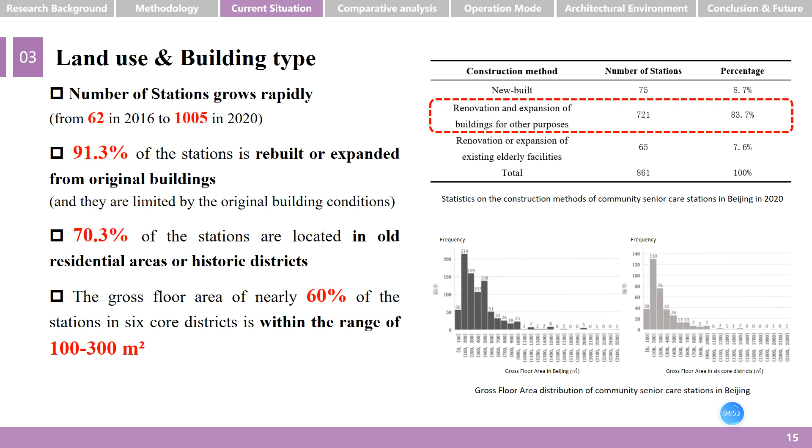In terms of land use and building type, the number of stations has increased significantly in recent years, but more than 90% of stations are rebuilt or expanded from original buildings, and 70% of stations are located in old residential areas or historical districts with restricted building conditions, and the gross floor area is small.

In terms of distribution, there is uneven distribution of independent and chain stations. In summary, station number is growing continuously, but most of the stations still face many problems, such as uneven distribution, restricted building conditions, and unpromising service situation.

services is higher. In terms of profit and loss, the operating cost of chain stations is much lower than independent stations. However, the loss situation has not improved. According to the information obtained from field interviews, it may be because some brands do not have station check-in services and have higher decoration standards, and the income of door-to-door service and the catering service belongs to the head office, and the station only plays a docking role.

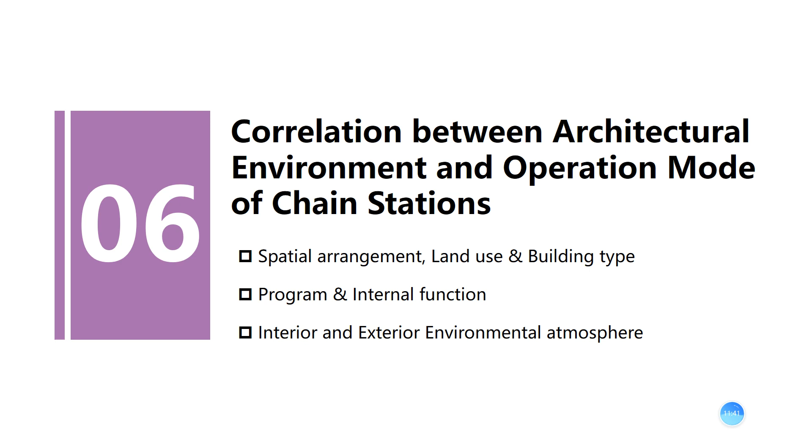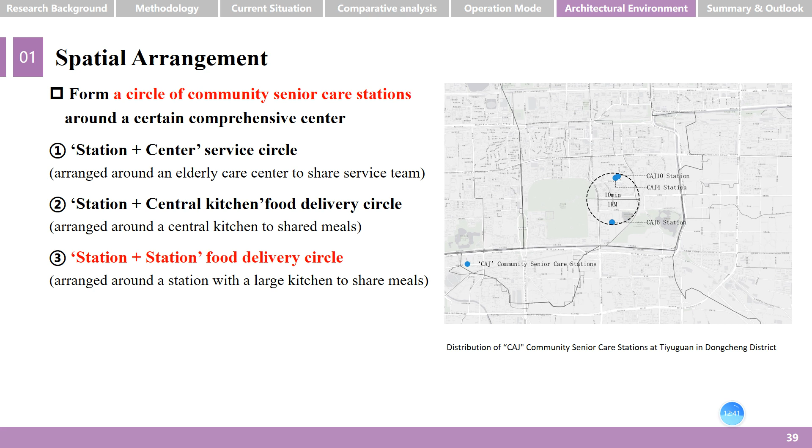For example, Longzhen stations are laid out around care centers, sharing service teams and forming a 3 km diameter station plus center service circle. Hongfengying stations are laid out around the central kitchen, sharing meals and forming a 3 km diameter station plus central kitchen delivery circle. And the CAJ stations in Gymnasium Road block are laid out around the station with a large kitchen, sharing meals and forming a 1 km diameter station plus station delivery circle.

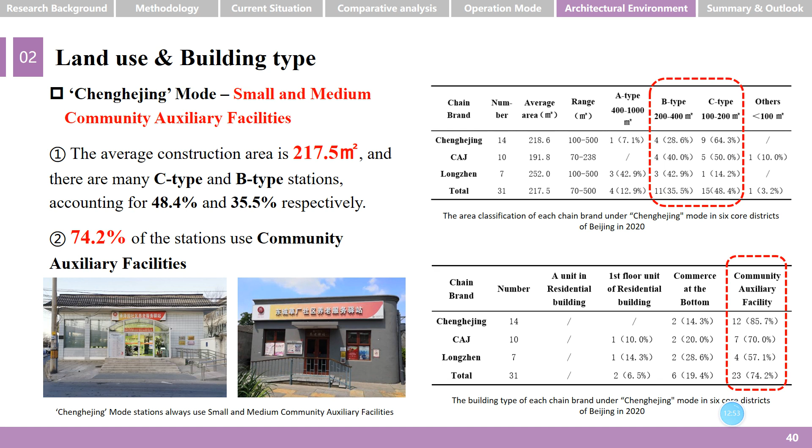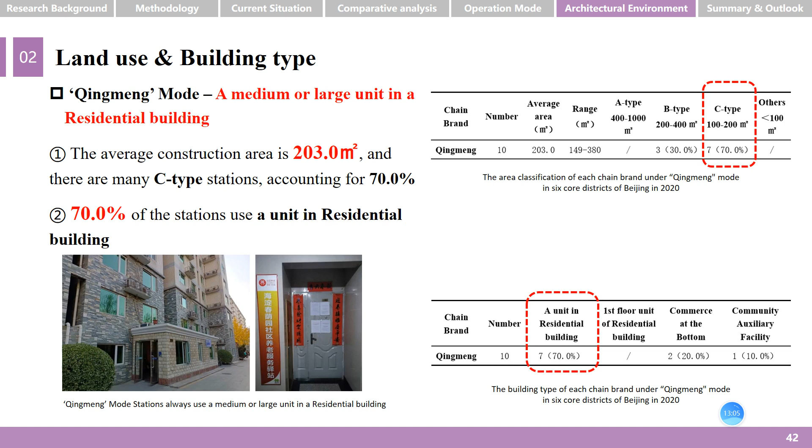In terms of building type, 诚和敬 mode stations mostly use small and medium community auxiliary facilities. 明仪红星 mode stations mostly use community auxiliary facilities and first floor residential buildings. 青盟 mode stations mostly use a medium or large unit in a residential building. And 乐龄 mode stations mostly use medium and large community auxiliary facilities.

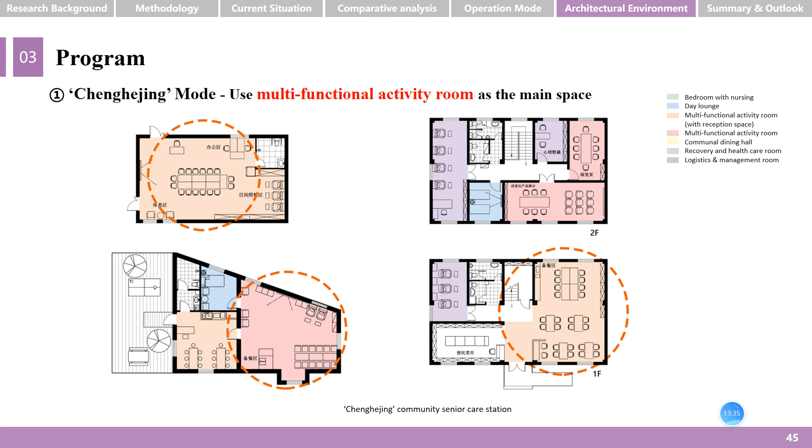In terms of program, according to the analysis of 96 stations, there are differences in the program of stations in different operation modes. 诚和敬 mode stations use the multifunctional activity room as the main space. The proportion of space area for cultural and sports activities can even reach 80%. 明仪红星 mode stations place more emphasis on communal dining hall and kitchens.

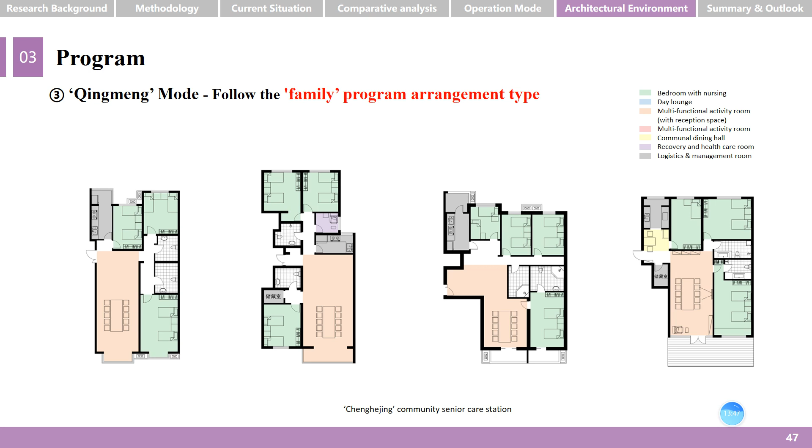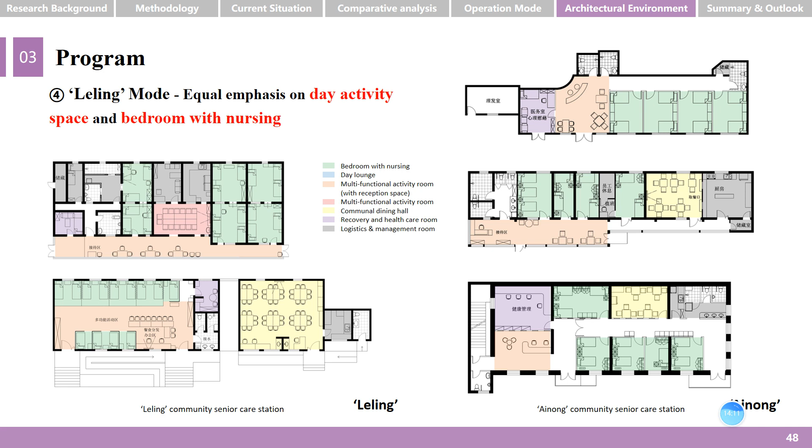青盟 mode stations follow the family program arrangement type, and 乐龄 mode stations place equal emphasis on daily activity space and bedroom with nursing. However, 爱农 in the station plus housekeeping mode will give priority to setting up a communal dining hall, while 乐龄 in the pure station mode will give priority to setting up multifunctional activity rooms. And the combined medical and nursing mode provides additional medical rooms. The elderly and children coexistent mode provides additional rooms and spaces for children's activities.

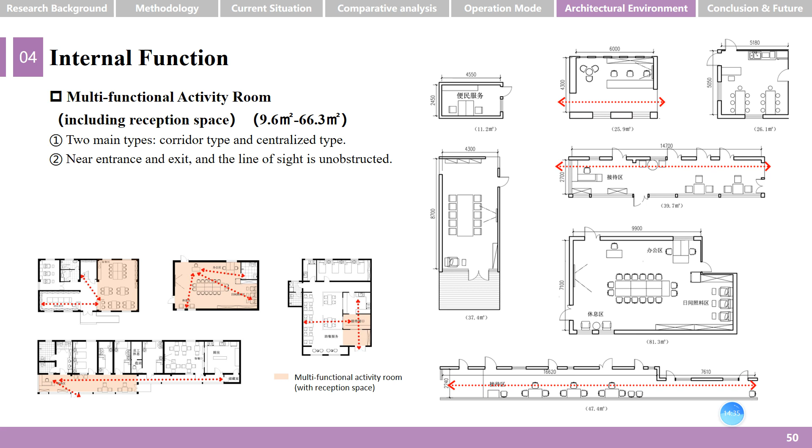In terms of internal function, the multifunctional activity room, including reception space, has two main types, corridor type and centralized type, and it is always near the entrance and exit. The multifunctional activity room often has a centralized layout, and it prefers to use table combinations to make the space available for multiple programs and maximize space utilization.

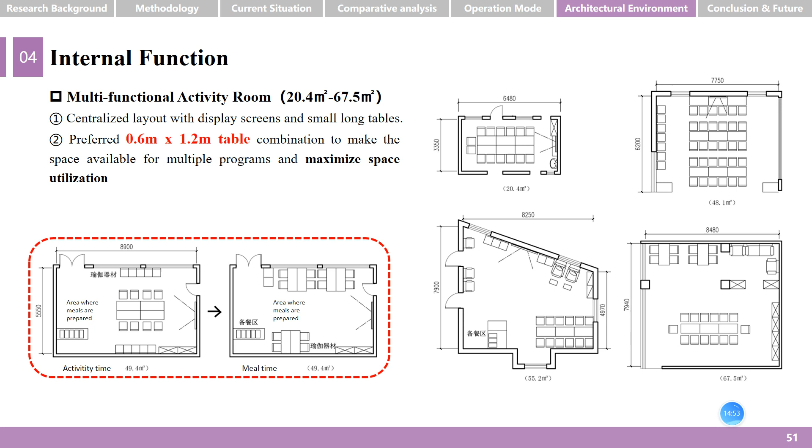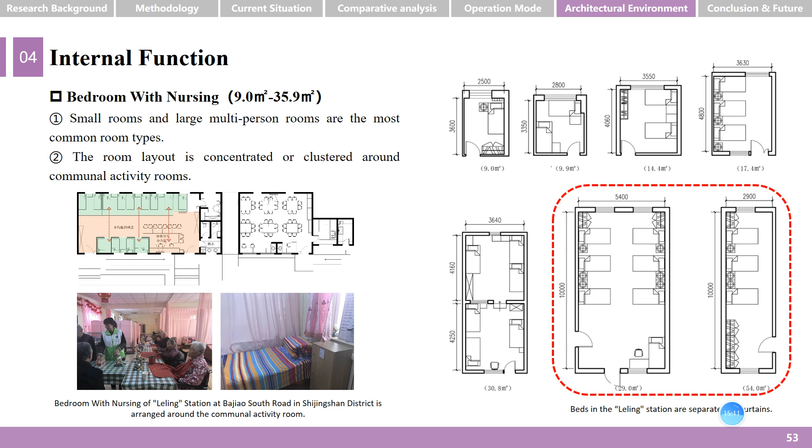Dining tables are evenly placed and spaced in the communal dining hall, and the dining area is close to the kitchen for convenient access to the food. Small rooms and large multi-person rooms are the most common room types for bedroom with nursing, and the room layout is concentrated or clustered around communal activity rooms. Toilet or shower rooms with nursing can be scattered or concentrated together to form a cluster.

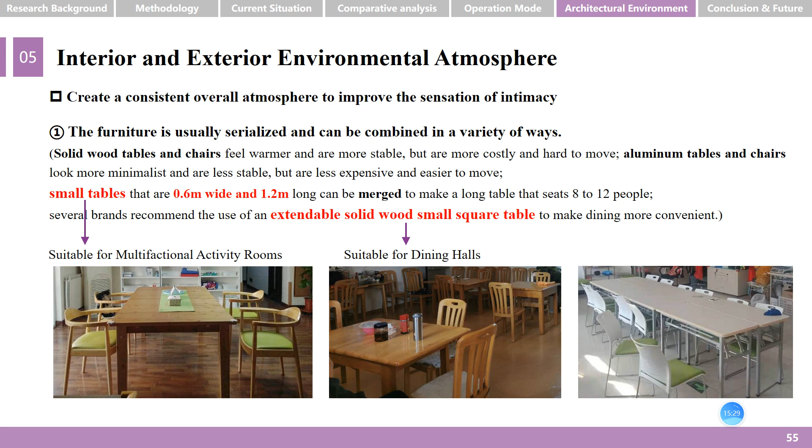In terms of interior and exterior environmental atmosphere, chain stations not only use serialized furniture, consistent environmental color and a unified logo system to create a consistent overall atmosphere and build a brand image, but also pay attention to individual territorial distinction. For example, one Chenghejing station is located in a historic district, and it preserves the original appearance of the courtyard. In conclusion, chain operation mode is particularly suitable for promotion, and there is a matching relationship between operation mode and the architectural environment.

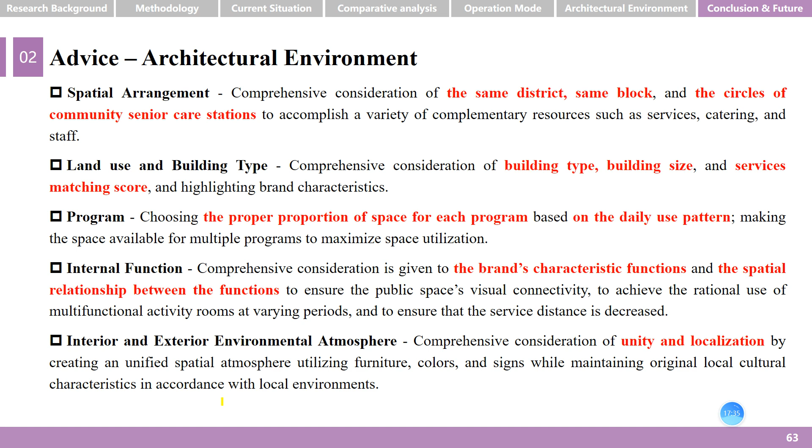And there is some advice. In terms of operation, the operating organizations can use the internet to assist operation and learn from the pure station mode to form an external collaboration platform and an internal mutual assistance platform. And they should enhance the level of standardization. In terms of architectural environment, operating organizations should have a comprehensive consideration while designing each station. For example, while choosing the location, they should have a comprehensive understanding of building type and building size to match the services, and highlight brand characteristics. These are the contents of my defense.